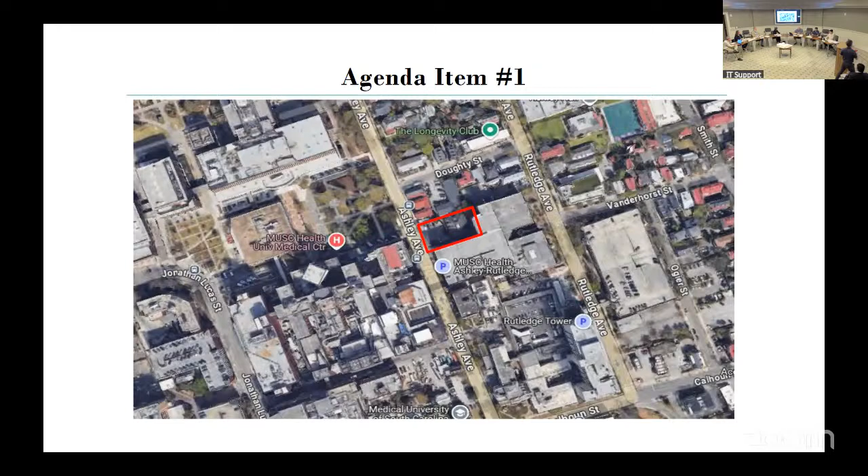Thank you, BD, and good evening. Jeffrey Rendrain, LS3P. I just want to say I echo BD's sentiment, and I appreciate your time here. You just got knocked 5 points. We're going for it, okay.

I think we've heard a lot of great comments the last two times here, and we're going to focus on the last round. The main comments we heard from the board and staff were on the north elevation, and it felt still too monolithic, needing a bit more refinement and breaking down to that scale. In addition, city staff had comments about the use of the green color, so we explored that, as well as the use of wood on the soffit at the porch element. We'll see that today.

So here are the improvements facing Ashley Avenue on the north elevation. What we really tried to do here is start to break down and articulate that secondary mass, the horizontal siding mass facing north. What we ended up using was a kind of hyphen element between the two masses, allowing that to expand up to the top, so we really have an articulated top along that side facing north.

And we continued the vertical rhythms. You'll see, maybe a little bit larger here between the base, marching down on the north side, these widening up to about 2'2", about 26 inches wide, and allows the roof leader still to come down and be exposed there, but gives it a little more breathing space.

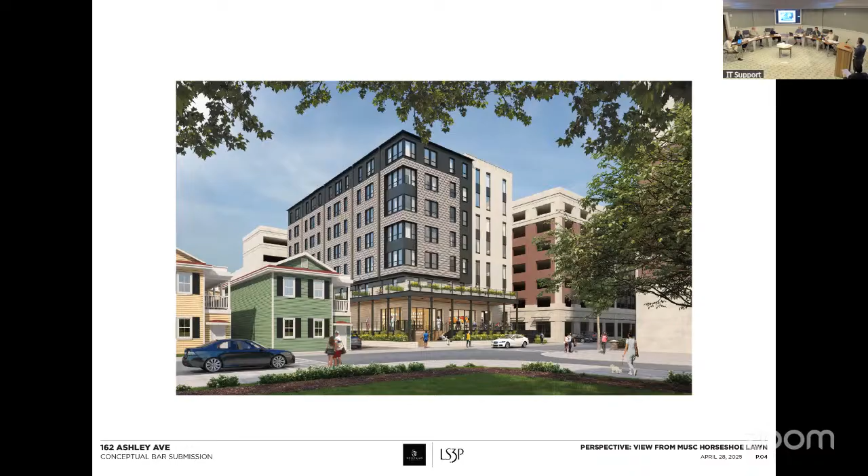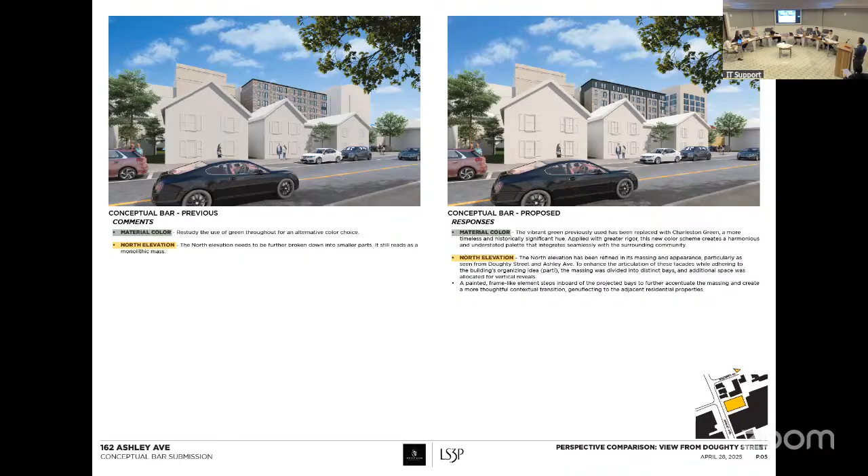So at the north, you start to see again that top expression weaving itself down between the panels and wrapping along the east side, which is facing the garage. Again, those gaps between the panels are 26 inches wide.

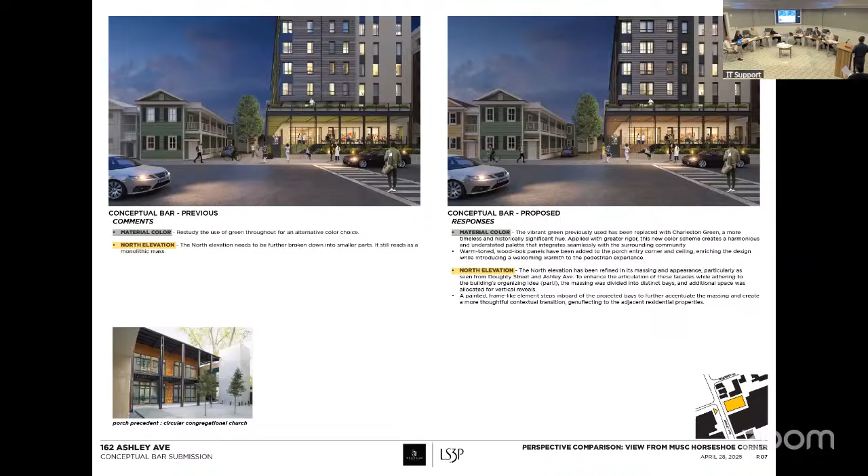And then at the base, really looking again at the porch element, we made some improvements from the original design to this second round. We kept a lot of it the same, but we did bring back that wood soffit element — the color before could feel dated, and we tend to agree with that comment. We wanted to bring that warmth back into the entrance, so you'll see that carved in where the steps reach up and on the soffit. But we still felt like bringing some of that Charleston green color in, so we have a reduced palette of materials — all the metal at the porch element and the base would be that Charleston green color, as well as the siding going up.

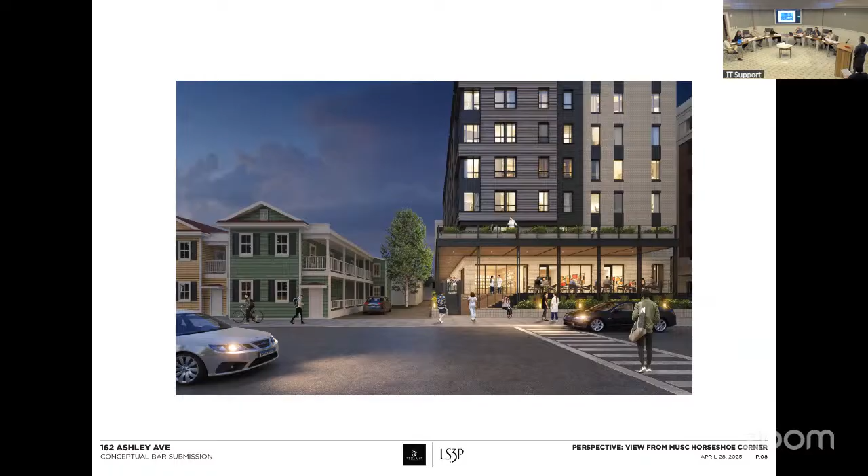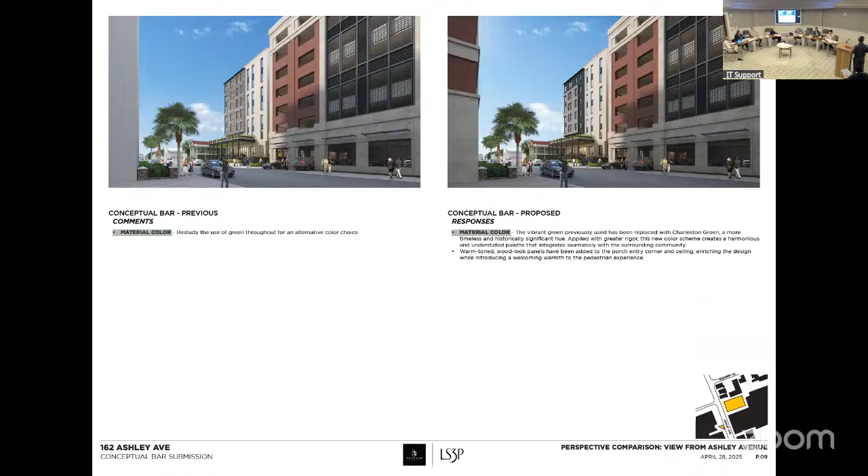This is how it approaches and looks from the south facing, or heading up north on Ashley. Again, you start to really read the three masses stepping down. And here you kind of see the full breadth of all the language of the materials — the brick, the wood, the Charleston green that expresses itself in siding on the vertical side, at the porch, and at these window portals.

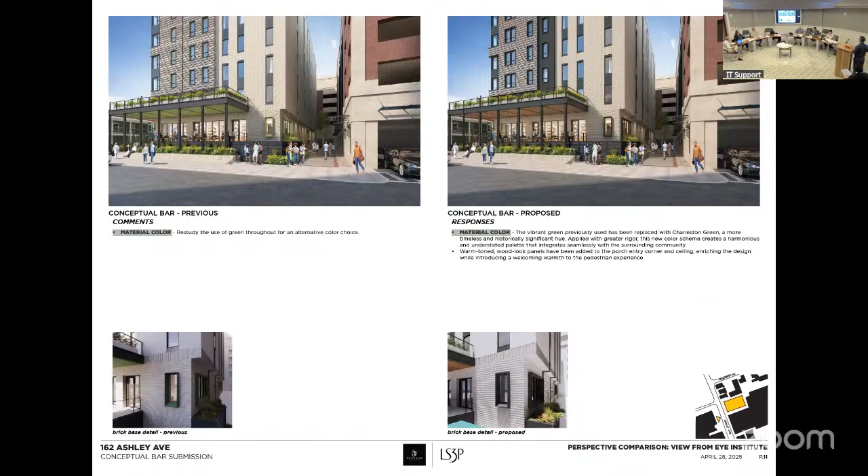Yeah, and that's what we have for you today. We'd love to hear your comments and thoughts here, but we feel like this has really gone well, and we love the dialogue that we've had with y'all. Appreciate it.

Okay, any questions for that? Hearing none, we'll move on to public comments.

Anna Catherine Alexander with the Preservation Society of Charleston. We really appreciate the applicant meeting with us on recent revisions as they have throughout this process. We really do appreciate that there's been effort to visually step down towards the neighborhood with the updates in this design, but in keeping with our previous comments, we do reiterate that...

the actual height of the northern mass should step down further to soften the transition to the 2.5-story single house and the adjacent context. And then lastly, also in keeping with our previous comments, we continue to encourage study of options to work around that transformer location that's on the screen there to create a more open and continuous ground floor treatment, in particular, increasing the opening size and continuing the porch expression to that south corner if possible. Thank you so much.

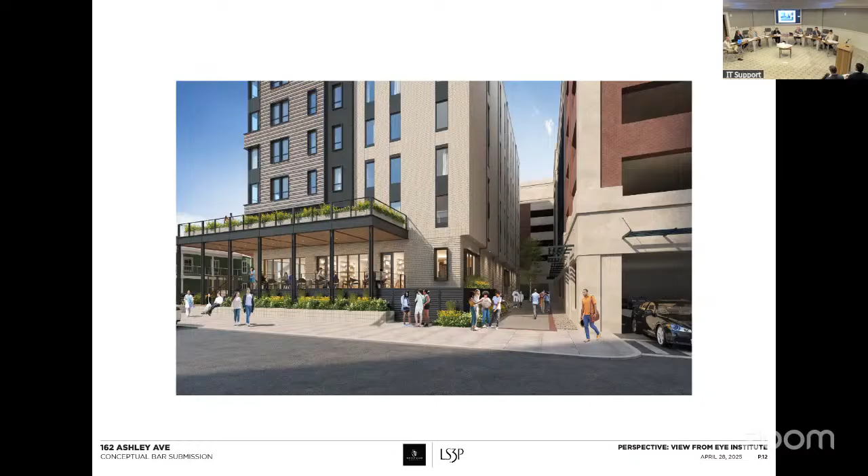Any further public comment? Staff? Sure. At the April 2025 meeting, the board deferred this application for board and staff conditions, which included restudy of the use of green throughout for an alternative color choice and continued study of the north elevation to break down the perception of the mass.

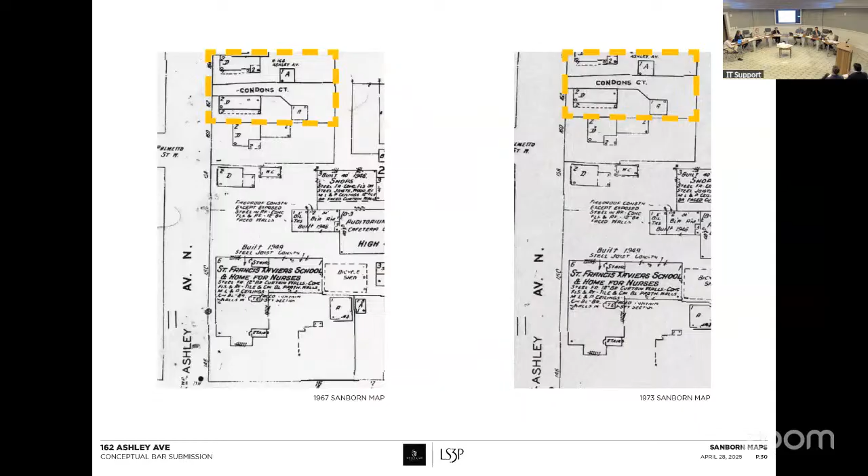The applicant has replaced the use of bright green with Charleston green. Staff approve of this color change.

The applicant has restudied the north elevation to include a material and color change at the top floor and increased width to the channels that provide visual breaks along the facade. Staff support the appearance of the vertical reveals, which create the perception of vertical bays rather than one long mass. Staff also affirm the color change, which provides the illusion of stepping down toward the residential context.

There is a slight depth change on the north elevation between the lighter metal panels and the dark siding. Staff encourage increasing that depth even further during preliminary. Staff also prefer higher end materials other than fiber cement siding for this building.

If siding is to be used, samples need to be presented at preliminary. Staff encourage the study of detailing that does not mimic traditional siding, but rather a detail such as nickel gap, channel gap, be studied to give it a more contemporary look.

Staff conditions at preliminary: bring samples of all proposed materials and provide details of key moments of the elevation in the drawing set. Staff recommendation is for conceptual approval with board and staff conditions. Any applicant response? Okay, board discussion.

Jeffrey, what's the story with the transformer again? So the story of the transformer is, it's their only street facing facade. And so we tried to put it in the back of the building, maybe work out an easement with MUSC. But looking at that, they wouldn't be able to get a truck back there. We need to be able to get a truck back to the building.

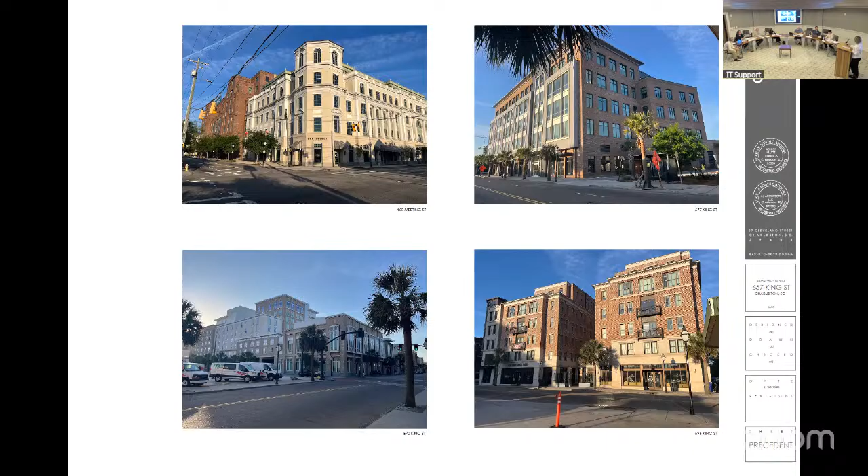We'll look through this pretty quickly since y'all have seen this before. This, of course, to remind you, is the site. These are some precedents of buildings in the neighborhood, just so that we understand the context of the newer structures that are there. Sanborn maps. And this is our site plan.

I'm not sure there's a lot to talk about on the site plan other than the massing of the building has changed slightly as we pushed and pulled those elements. You can see now how it's changed if we go from one to the other, how we've pushed those elements back - the previous submittal on the left and the proposed submittal on the right. We've also changed the color palette to a lighter color brick and a darker color window, and we've added a lot of fenestration to the penthouse elements, which we'll get to in a minute.

This is just an orthographic elevation of the structure so you can understand. We've removed some of the banding on the top floor and stepped it in, and we've maintained the banding at the bottom. And here's a render of that elevation.

This is the King Street elevation. This is another detail of the brick detailing on the building, and you can see the banding. As you move up the building, we're proposing a chevron pattern panel between the windows.

We've actually stepped the brick surround on the buildings to add two steps to it and make them wider. We've added these recess elements that we had on the building that go all the way around, and we've stepped in here. We've added a cast stone cornice here on those tower elements.

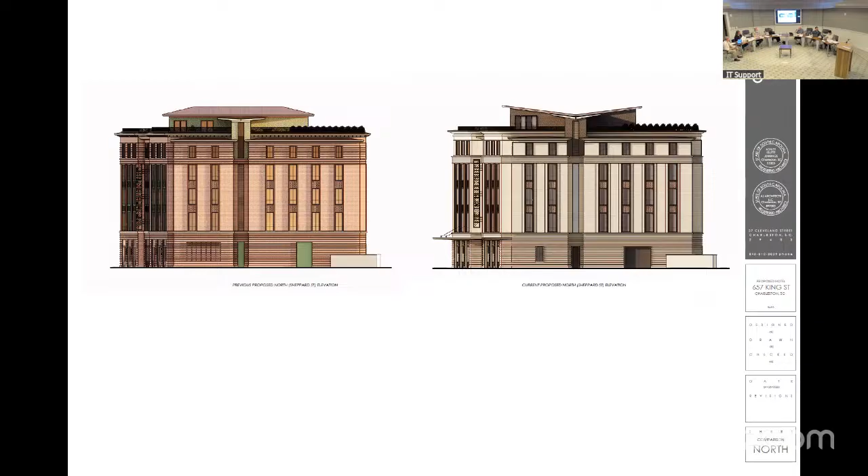Once again, you can see that we've stepped in the top floor and we changed this detail on these tower elements to a cast stone. And this is just that orthographic version of that north elevation, which faces Sheppard Street.

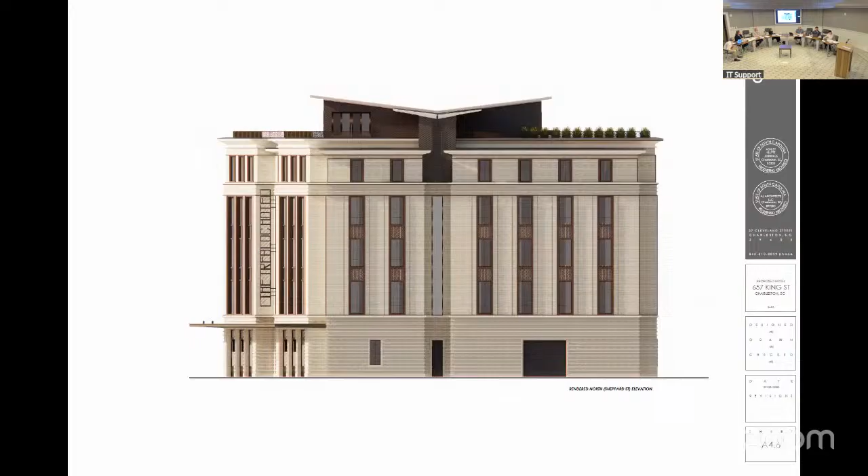There was also a lot of discussion about, we had a brick grid here with some glass block in it. There was a lot of discussion about not liking that, and we've removed it and just put a single window there.

And then this is the west elevation, which faces the overpass. You can see here that there's a little bit of difference in the penthouse element once again. You can also see that we started to add these recesses that give a shadow line here. It's a little fuzzy in these renderings, but the idea is to add a little bit more detailing to all faces of the building.

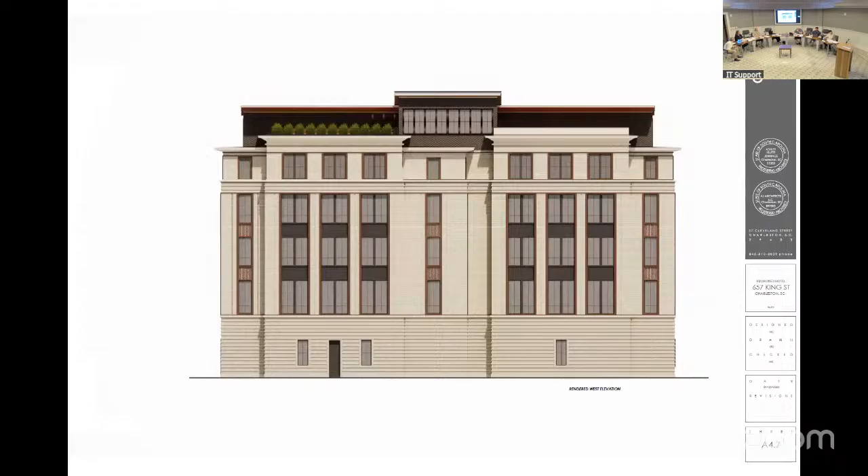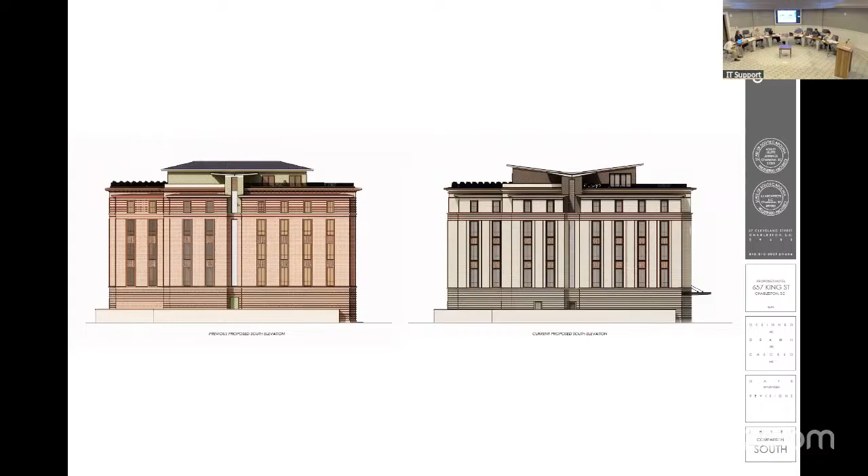And then finally, the previous proposed and current proposed south elevations. Once again, you can see the change in the penthouse roof structure. You see where we've added the cast stones, these elements, the taller elements here, and then you also see that we've added some detail here as well. And that's orthographic of that.

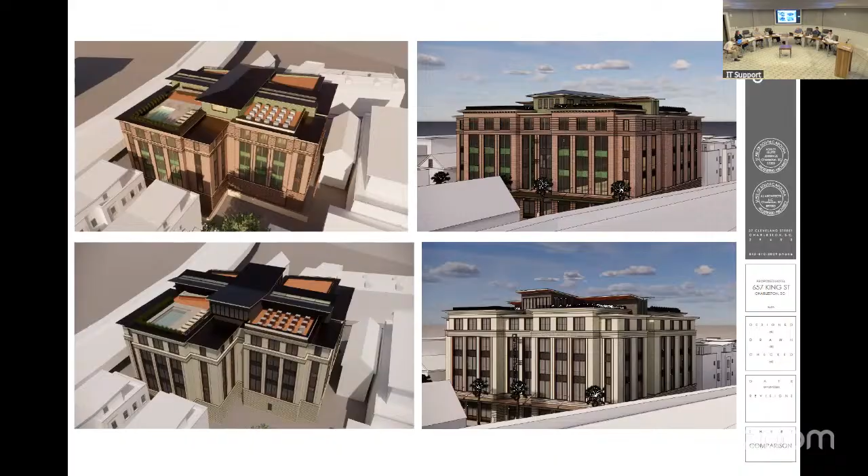And then some previous and current proposed. I think you can see that there was a comment about the building being boxy or flat. I guess that referenced it as being flat. And the intent here was to pull those windows back within the face of the building to give a little bit more of a shadow line, to give a little bit more depth, and to push and pull those elements so that there was some more articulation in the building.

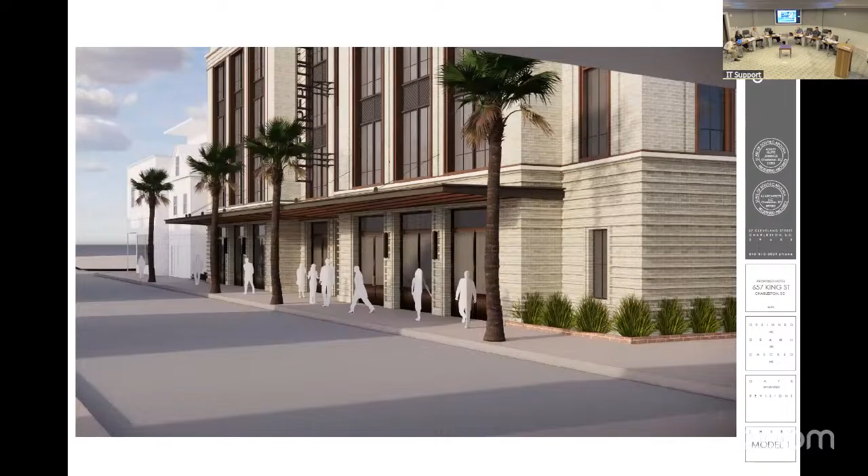And you can see here that we've started to introduce some more detailing on the canopy. This is a kind of a representation of a sunburst pattern that you would see in Art Deco style motifs.

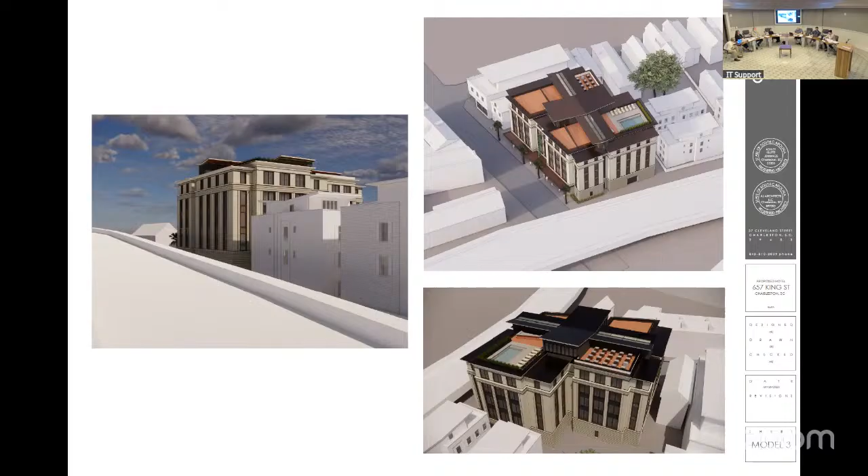I'm looking at it as you look up King Street. This is the view from the overpass here. Just an aerial so that you can see how those penthouse elements work. And this is looking at it from the back side, if you were a bird in the air looking down on it.

And then the rest of the presentation is just the variations between the plans if you need to go through them. And I'll be happy to answer any questions.

Okay, any questions for the applicant?

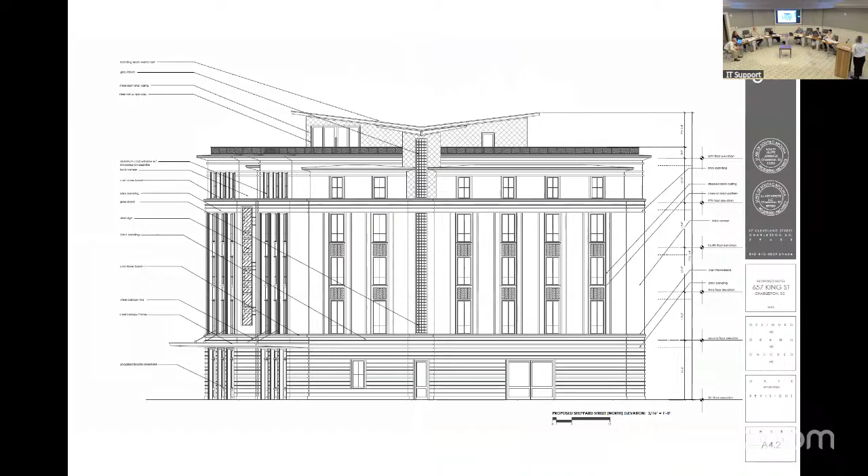I have one for you. I'm trying to find the best elevation to. Let's see. Might be elevation. Sorry, I got confused in the drawings here. 4.1 King Street elevation, I'm sorry. I'm trying to find what page that's on. At 4.5, I wrote down 8.5. I'm sorry about that. I think it might just be a rendering question, but I was just curious. I know that elevation's on an angle. Is that elevation taken square to the building or is it square to the front elevation?

It's, because we set it up so that it was orthographic, so it eliminated that in the rendering program that we did, so you would see this piece a little bit. And what I was curious about is the windows at the upper story, the kind of fifth floor windows.

The mullion bars at that level are shifted from the other mullion bars at the 2nd to the 4th. Is that intentional? It looks like the windows are also off from where those are. It's a rendering, but that story steps in - it's that angle change as you're looking at it, just the rendering program.

So if you look at it in the orthographic, the intent is that they align. Does that make sense? Yes, okay, I just wanted to make sure.

And then one other simple question too. At the ground level, above the doors, are those supposed to be kind of translucent spandrel panels, or are those gonna be kind of visible glass above those? Are you talking about this area right here? Yes, that's a transom. But is it visible or is it translucent - can you see through it? You'll be able to see through it. Okay, yeah.

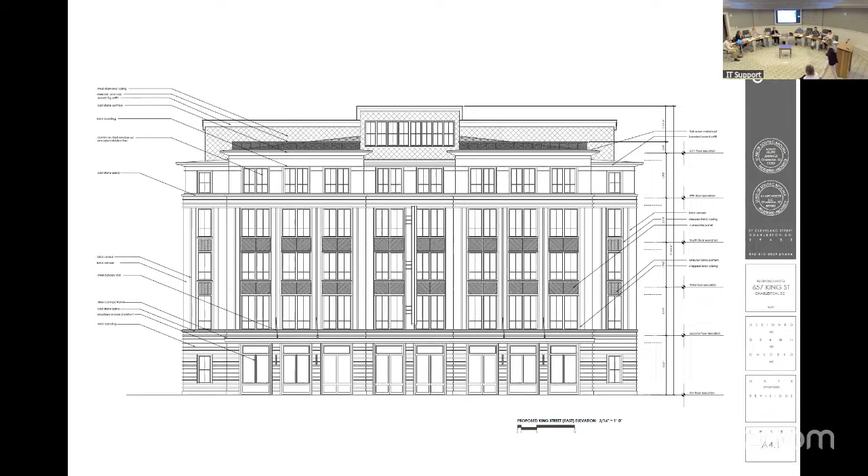At that March meeting, legal was consulted and made a determination outlining that when 2 height districts affect 1 parcel, the code provides that the least restrictive district will apply, but only for 50 feet from the boundary. The applicant's proposal is 45 feet from the boundary, and District 6 is the least restrictive for this particular submittal. Hence, per ordinance...

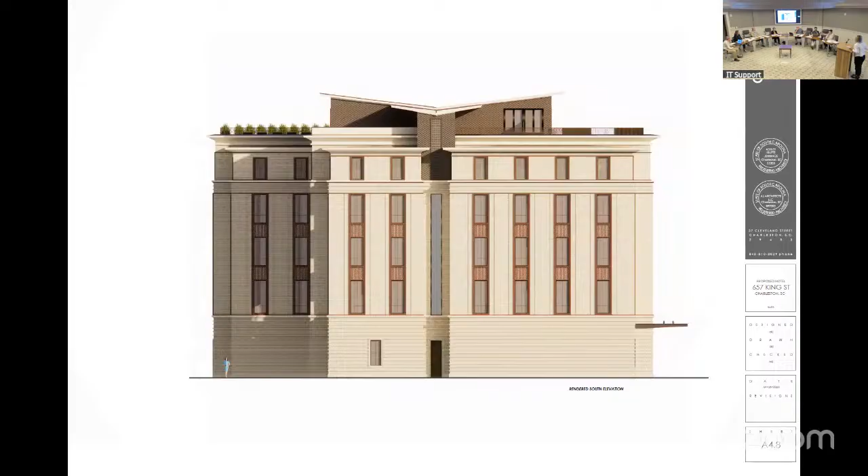The other comment I wanted to briefly speak to was the idea that the structure completely fills up the site. And it doesn't.

We do see really good examples of structures in the city that build to the 0 lot line. This is definitely not one of them. As you can see, we've got space all the way around the structure, and we're stepping it back in the front to create a little bit of green space. So the building does not 100% occupy the site. It doesn't even go all the way out to the sidewalk at the front, to give a little more width of sidewalk there. Those are the only comments I was going to make.

Thank you. Okay, all right, on to board discussion.

Well, usually very talkative, don't have anything. Well, you like it?

You want to go with your quote from the previous project? Yeah, I think it's a substantial improvement. I appreciate you working on it.

I appreciate you being here today. I had noticed the same thing about the height when this first came before the board, and we talked about it with legal. I think this is one of the crummiest little ordinances we got, saved by 5 feet. But it's apparently the way the city is interpreting it, so we're taking that at face value, as we must.

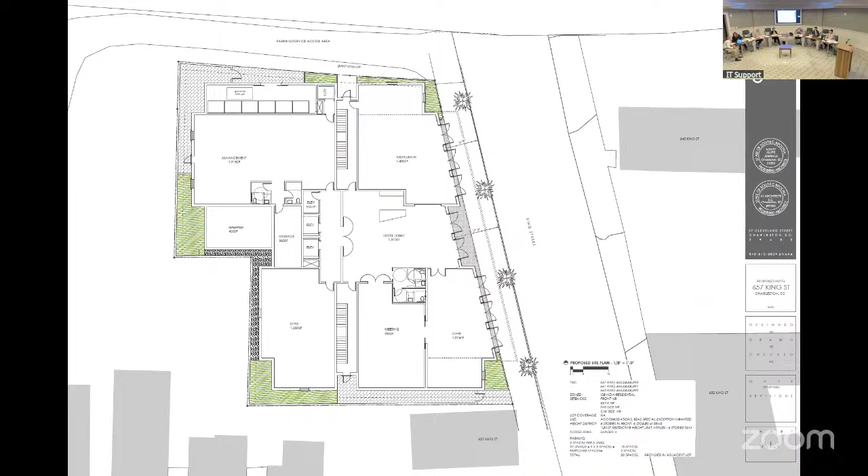One part of this project that also caught me, and that we talked about in the last meeting, is viewing the structure from the street and then also from the overpass. I'm glad you included additional renderings from here, because I think this building has two experiences, one at high speed and one at pedestrian scale. I went back to December to look at the 2, the 4, and the 6 to see what that massing led to, and looked at this structure too.

It seems to try to balance a lot of the experiences around this. A lower structure, while more deferential to what might be going on directly adjacent to it, would also lead to seeing a bunch of mechanical units, which is what you experience as you drive further up that street. It's a tough thing to balance.

I do think we're trying to engage the pedestrian walkway in an engaging way. And I do think the materials as rendered, especially the articulation around the windows and the cornices detailed by staff, is a significant improvement versus before.

Okay, any further board comments or motion? The comment's been made by the public that the structure and its massing doesn't fit in this block, right? And I would agree with that. It's 2 and 3 story structures all the way around it, all of which are historic.

When you look at the comparison models, the 2.5 story structure right next door to the proposed project is just snuck in there. It's overcrowding, regardless of as much space as you say is going to be there.

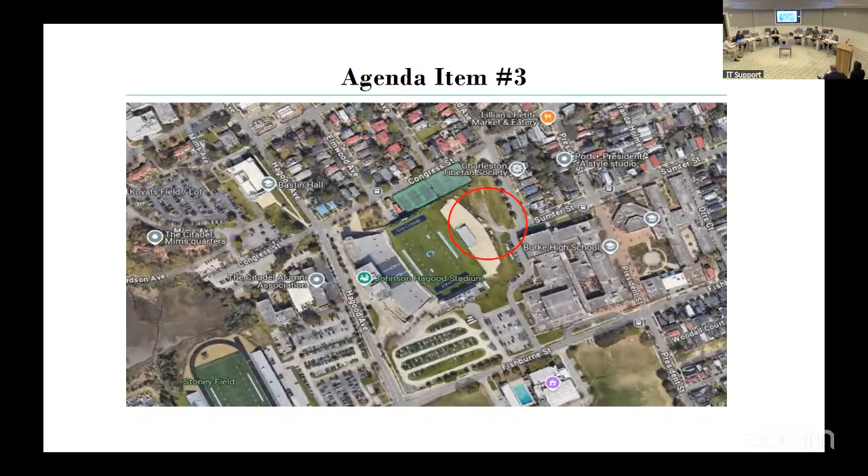Good evening, my name is Laura Slagle. I'm with McMillan Pazdan Smith Architecture, and I'm representing the Citadel tonight for the Johnson Hagood Stadium East Stands replacement.

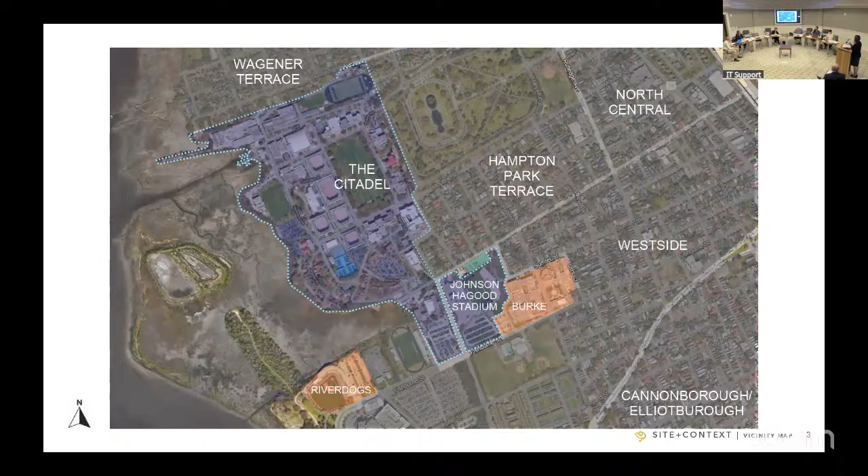Just to get you oriented, I'm sure most of you are familiar with the Citadel campus and the west side of the peninsula. The stadium is just south of the formal campus, between Fishburne, Hagood, Congress, and Parkwood. Several of y'all have driven past this many times. Here's an aerial of the building, and let's zoom in a little bit.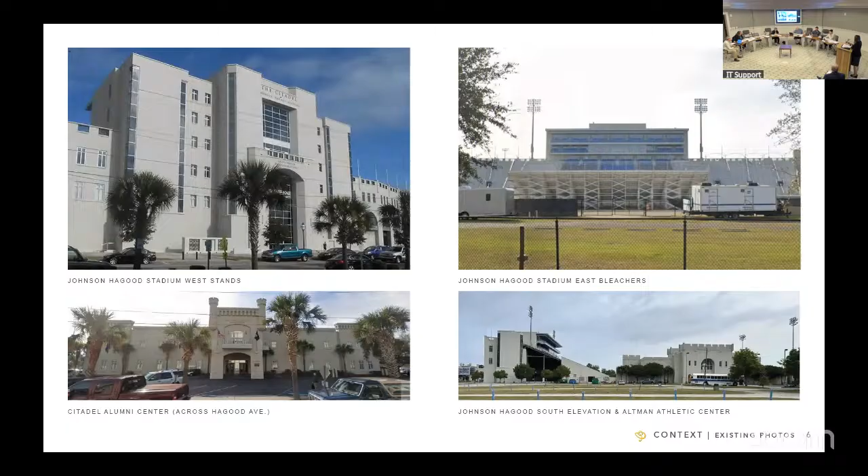Here are some of the adjacent buildings and across the street. There's Burke High School, and also some smaller residences on Sumter and Parkwood.

In terms of contextual inspiration, we really wanted to draw details from the Spanish Moorish style around the stadium. We wanted to take cues from the materials that are out there, and also that sense of place and permanence that the Citadel instills in all of their buildings.

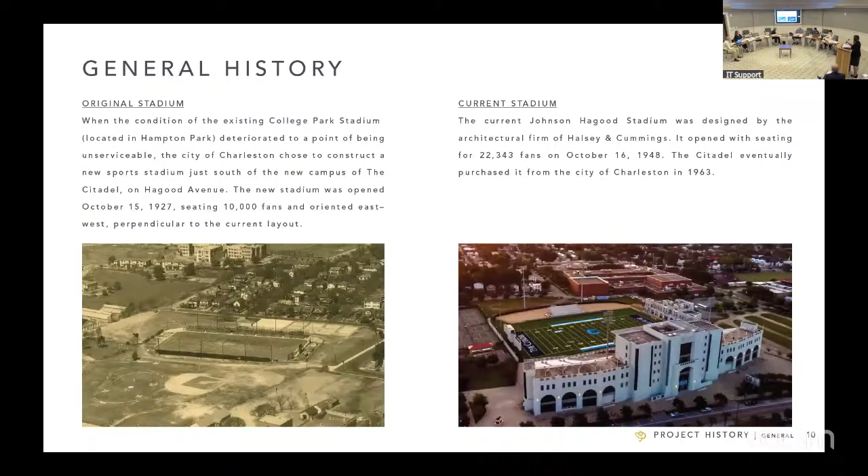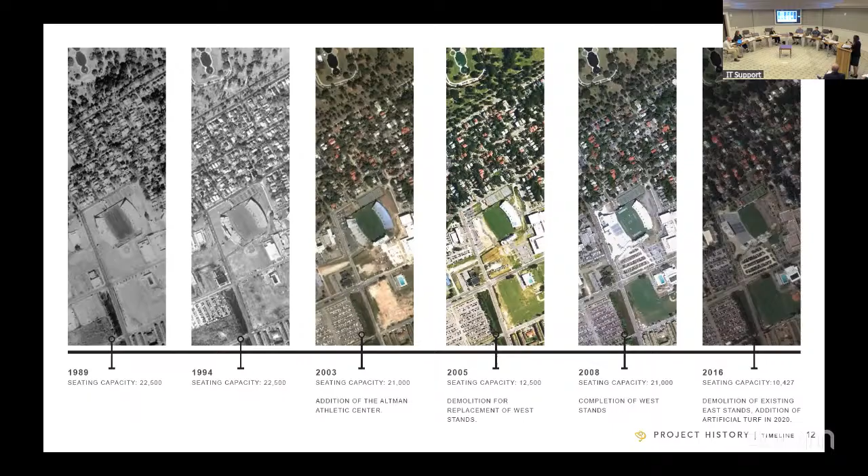Just a quick look at the history. The image on the bottom right is how we know the stadium today. It was built in the 1940s with about 22,000 seats. We've compiled some maps and aerial images through time showing it changing. There have been significant changes over time: they built the Altman Athletic Center on one end, rebuilt the home side seating, and most significantly, in 2016 they tore down the pretty significant east side permanent stands and replaced them with the temporary ones that stand today.

Right now there are 1,000 temporary seats out there, and the reason we're here today is that we are going to replace those temporary stands with permanent ones, moving from 1,000 temporary seats to 2,000 permanent. The other big part of the project is to provide permanent toilets for visitors. Currently, they are wheeling in portable toilets for home games, so this project will provide permanent toilets, along with some accessibility and infrastructure upgrades.

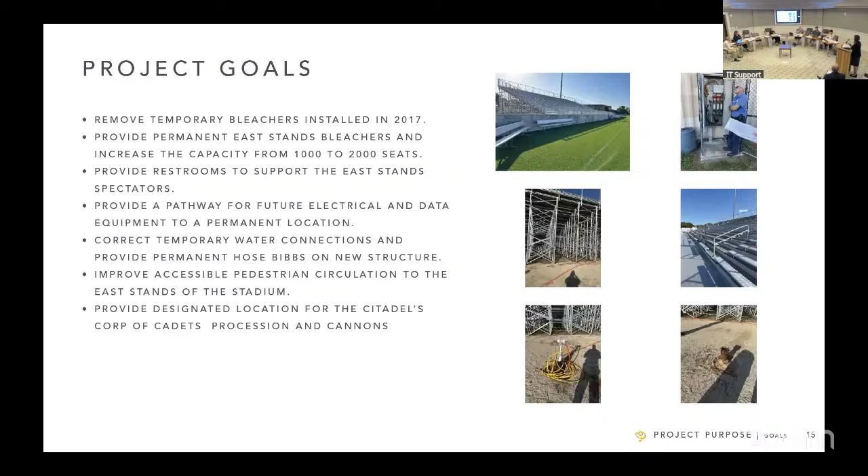The east side, with the existing fence and gate, is really more of a service entrance. This is where the Citadel facilities and maintenance come in, where the visiting buses park, and where the food truck enters and the cannons are rolled in. So it's important to note that while we're putting new bleachers there along with a new toilet building, it's not going to become an entrance off of Parkwood.

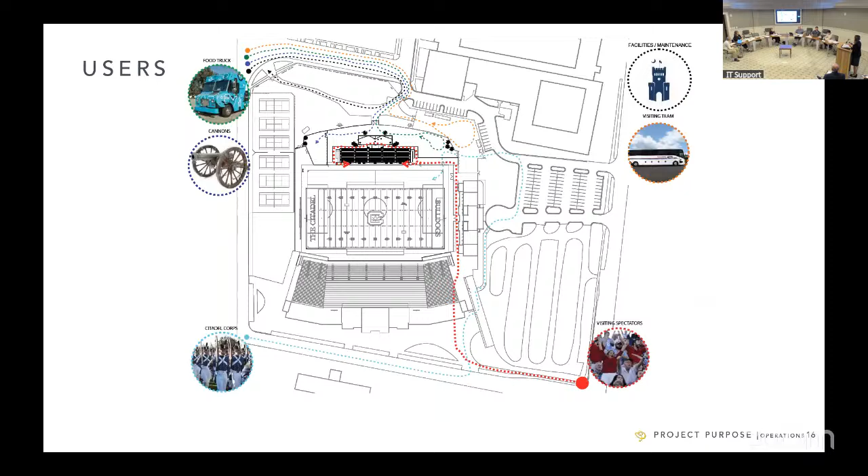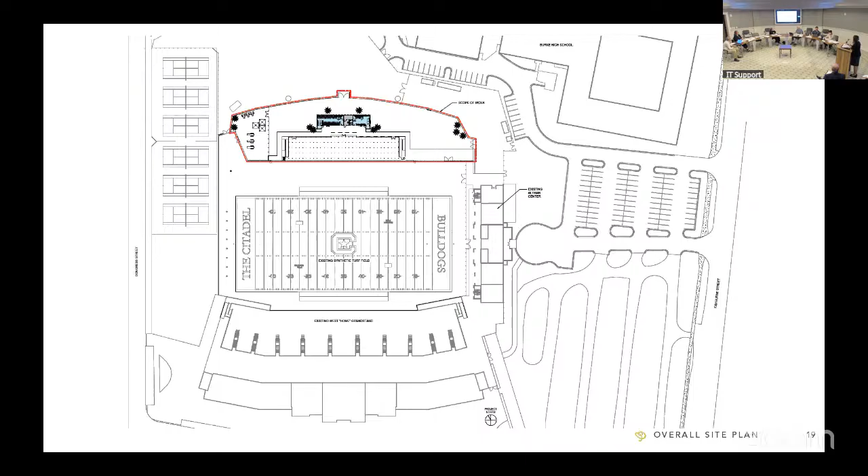This is the ground level, so you're seeing the underside of the aluminum bleachers, the leg truss structural system that holds it up, and the toilet building. What you'll see here is that it's a very utilitarian building: men's and women's toilets, a family toilet, a janitor's closet, and storage — that's really all the building encompasses. We put all of the doors to these rooms on the stadium side facing the bleachers, so we could have a nice, clear, clean wall facing the street behind it.

But pretty simple — the scope also includes a small fenced area on the left of the plan where the cannons will be rolled in, and most importantly, an accessible path from the other side of the stadium where the visitors will enter.

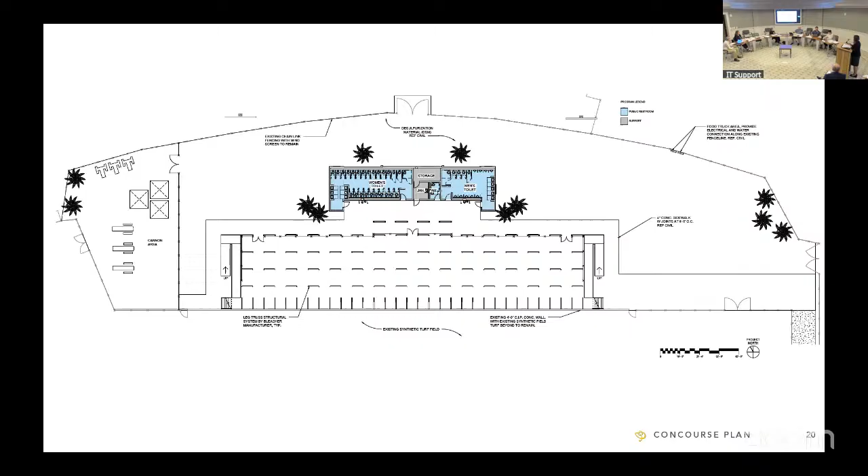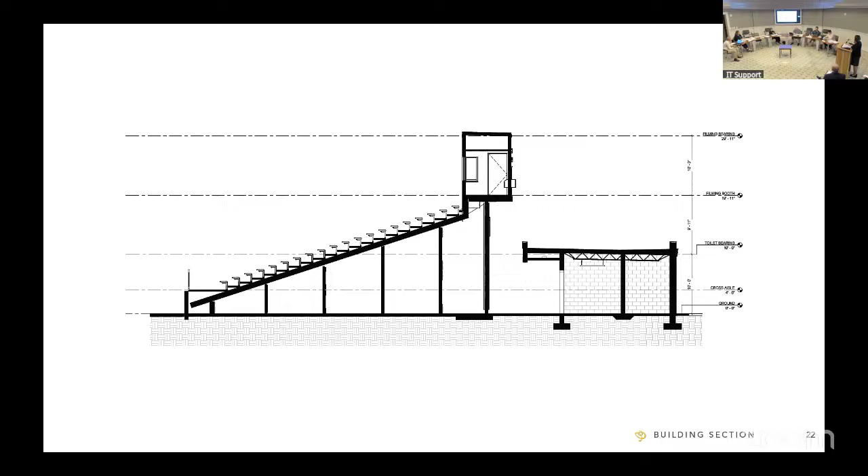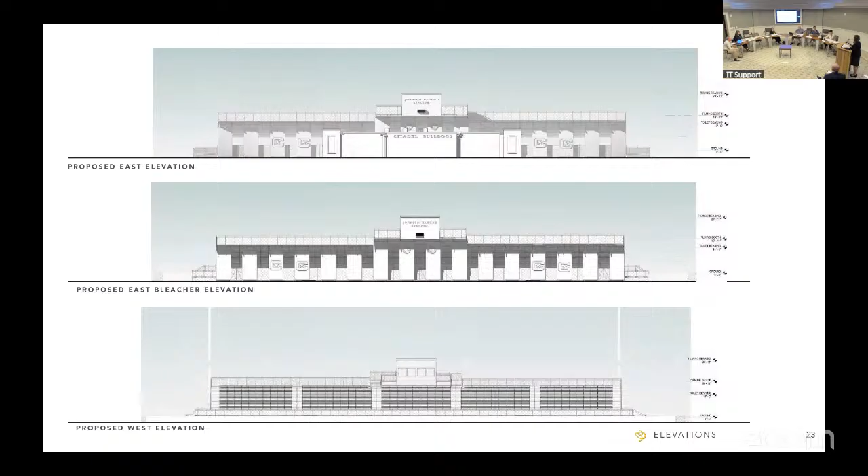There's a fence to protect it, but we also wanted to provide a moment for some signage and branding for the Citadel. This is a football stadium, so we're looking at the fan experience and using that to our advantage instead of just having some bleachers behind it.

Here are some side elevations. You can see we're using that branding again. And this might be the most helpful view here - we recognize that this facility is kind of a background building in the stadium. It's not the most important building there, but it is important to the Citadel for its function.

So we want to be sensitive to the context and help it blend in, with some subtle nods to the stadium, but we also don't want to overdo it. We think it would be inappropriate to do too much decoration or ornamentation on a toilet building. So we're really looking for that balance.

You can see here that we did step the facade in and out, and a little higher and a little lower as you go across that long linear building to break it up. We're using some expressed frames - that's a detail pulled directly from the Altman Athletic Center and around the whole stadium.

We did not want to put crenellations across the entire building, but we did find it to be a useful tool to help us as we step that parapet up and down and make that relief. Most importantly, we're using the Citadel gray color for the stucco so it'll blend into its context, and then we're introducing some of that branding I mentioned before.

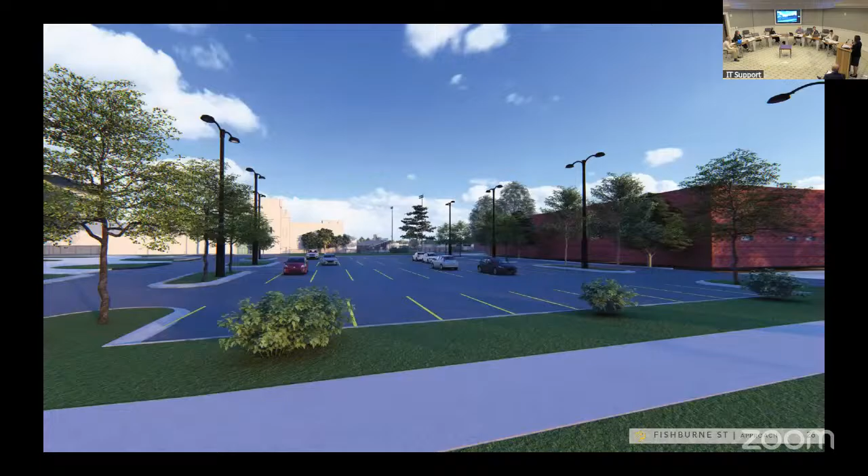And now I'm just going to walk you around and show you some of the views we prepared. This is from Fishburne Street, and you can see Burke High School to the right, the Altman Athletic Center behind the trees, and our little bleachers right in the middle of the back. So you can see that the scale is fairly small.

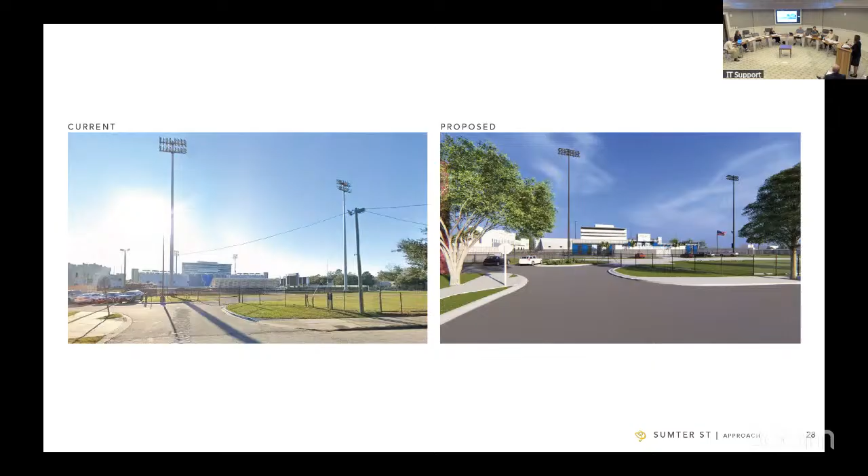I'll flip through these quickly. This is from Parkwood, so you just drive down that road a little bit farther. There's a couple breaks in the trees that we wanted to study to see what that long view would look like. As I flip through, what you'll see is that it's really just a cleaner look than what was there before - we're really replacing those temporary bleachers with something that's a little more aesthetically pleasing.

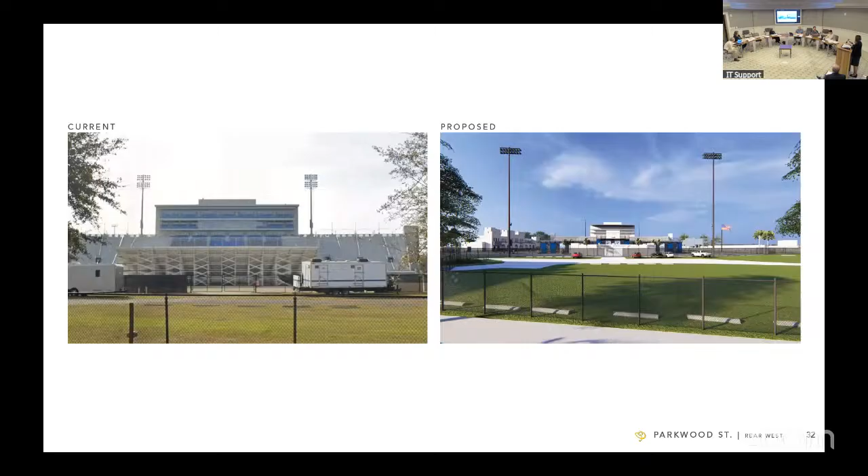We tried to clean it up, and yeah, I think this is a good example - instead of seeing the structure, you're seeing just a little bit of a nicer look.

This is from Hagood Avenue, and again, this is probably the best way to see the new building. I think you just recognize it.

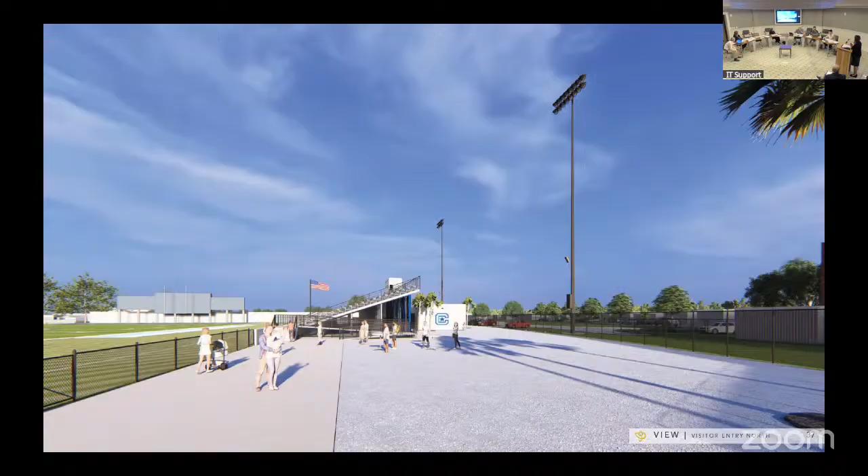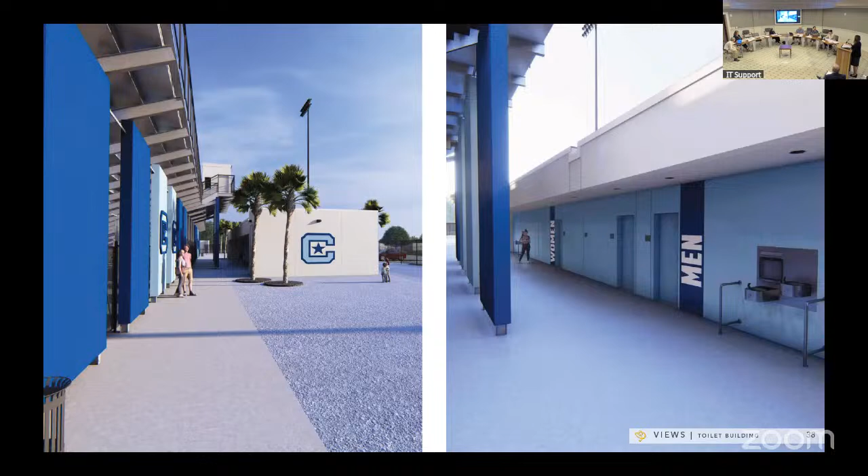This is what the visitor would see as they are walking around from that home side and approaching the bleachers. And then as they're actually coming down from the bleachers to go use the bathrooms, this is that area where they're approaching the bathroom doors. And this is just an aerial to give you that final orientation.

In summary, this is a small insertion for the Citadel, but a very important function to replace those temporary bleachers and finally put something permanent there. Aesthetically, we tried to really balance that kind of utilitarian building with blending into its context and being part of the Citadel campus and stadium.

This time, I'd welcome any comments or questions. Anybody have any questions for Laura?

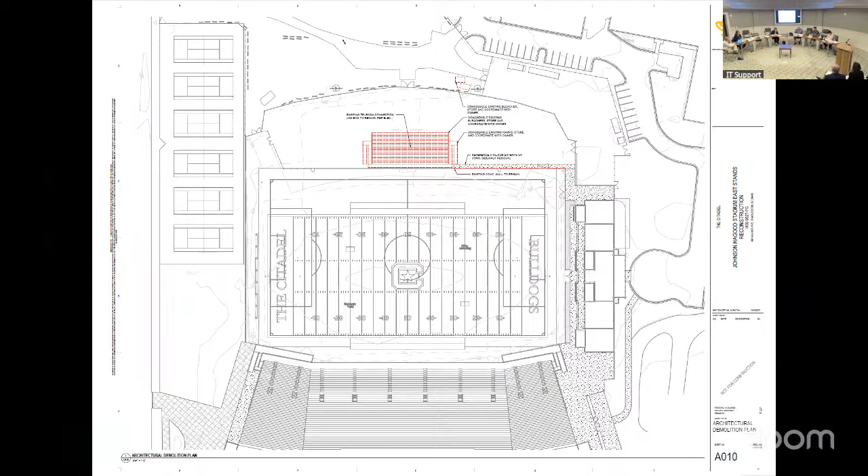Staff commend the thorough presentation of the context and project history of the stadium's various demolition and build campaigns to clarify the current request. A separate signage package will need to be submitted for all words and graphics on the bleachers and support building, as these are not part of any approvals or motions for this board discussion. Staff appreciate the attempt to visually cover the exposed bleacher structure with large-scale wind screening panels; a more permanent architectural solution is encouraged, such as perforated metal screening. The restroom building is modest but includes some references to the college building context; staff encourage additional subtle architectural elements as details are studied. The galvanized steel bleacher structure is a challenging choice for this climate, so staff encourage high-performance coatings in the specifications as the project moves into details. Staff has no conditions and recommends conceptual approval with board and staff comments and final review by staff.

Thank you. Laura, do you have a response?

Thank you. We appreciate the comments from both staff and the public. This has been a process to try to find a balance for a toilet building - we recognize it's a utilitarian structure, and we're trying to balance how much ornamentation or decoration versus how plain to make it. We'll take those comments into consideration and continue to study the facade. I also wanted to mention the comment about trees and landscaping - that's outside the project scope and boundary, but the owner does plan to address landscaping along Parkwood as a separate effort, part of their normal campus maintenance. So that might not be part of this scope, but it's understood by the owner. Thank you, we'll take all of these comments into consideration.

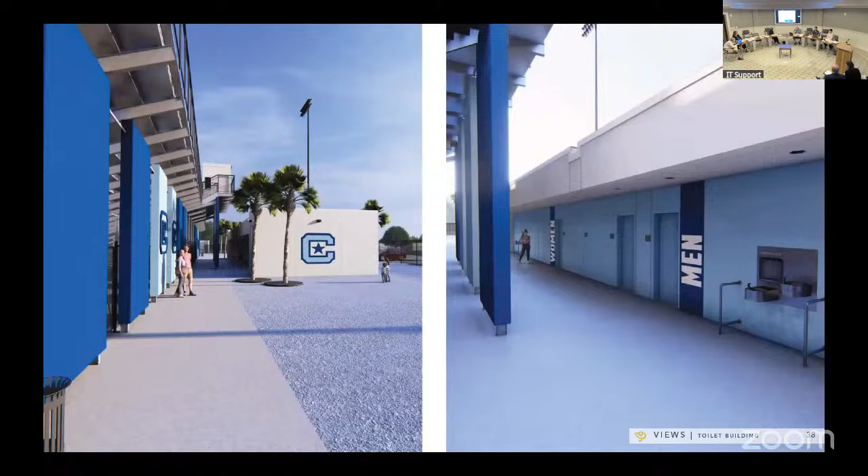As we're getting there, I'm thinking about Huger Street, Hagood, Fishburne, and Parkwood—you ride around and what you see is done well, like this.

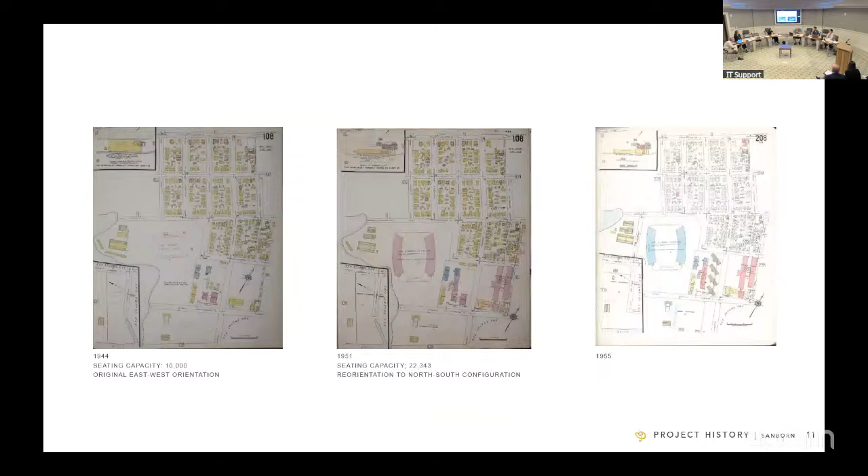And then if you go to page 25—as you're going through it, I use your historical photographs, which show the evolution of changes and detailing made to buildings. It's exceptional work and design.

And we get to this, and the existing visitors' bleachers look like the back—unfinished, if not a temporary system, which it was, as I understand. Those stands were built as temporary, and the addition, as it continues, looks to me like an extension of that temporary use.

I also found it amusing, Lauren—I'm not suggesting it was planful—but the use of the term toilet building and service building. I'm not surprised Kevin shows up with something like this. This is a guard tower, I guess, or something like that. But everything has a label.

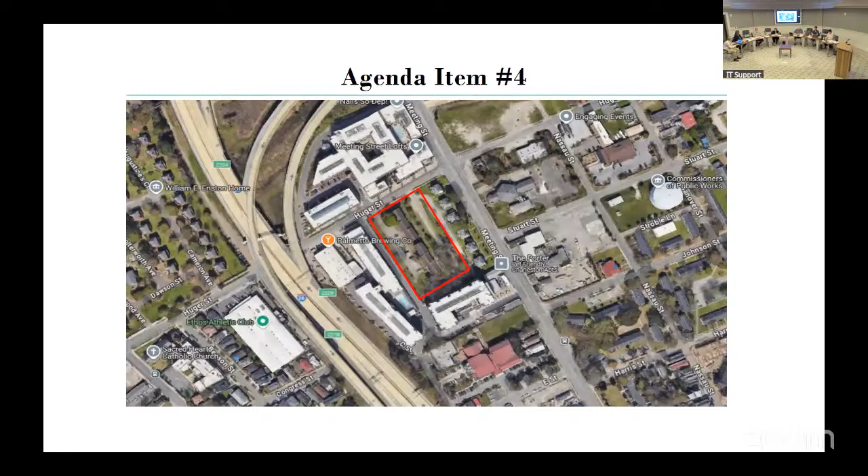Should have been in there. Oh, no. All right, well, I will verbally say, just a second, Matt, we're almost.

So here's my clarification. A different design for this site received preliminary approval with final review by staff on July 24, 2024, and permit approval by staff on October 8th, 2024. Per legal, when this submittal, the one we have before us today, receives conceptual approval by the board, any previous approvals will no longer be valid. This would be the sole application for the site going forward. This submittal should be reviewed as a new application for conceptual review.

Yeah, I just want to make sure I understand. Sure, absolutely. So the previous application was brought in by Eddie Bello, and somebody else maybe, but that was who was responsible for the design that got ultimately approved, all the way through the permit. And so now this is a new application, new architect, new design, so we should treat it as completely new at the conceptual level. Thank you. Sure. Okay, now we're ready for applicant presentation.

Thank you, BD. Appreciate that. I appreciate y'all letting me be here this evening. My name is Matt Davis. I'm the principal of Davis Architecture. And I'm grateful to be able to present this project to you this evening for a review and comment for conceptual approval.

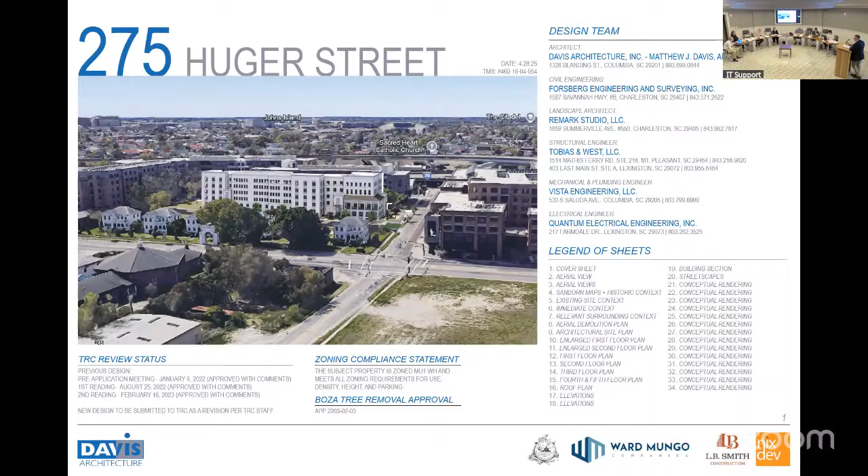And they served the community that was in need of housing. So I'll walk you through the images here, look at the 3D renderings to discuss the architectural details, and then open it up for questions.

So this aerial view identifies the location of the site. It also highlights proximity of this project and the 6 Grant homes that front Meeting Street to the Enston neighborhood, which is across the highway there, that was constructed starting in 1887. I reference this, it's located west of our site.

It features a monumental arch similar to the Grant homes. It serves as an organizing part of the campus. It also served, the Enston homes also served as an inspiration for the layout of the Grant homes and their location.

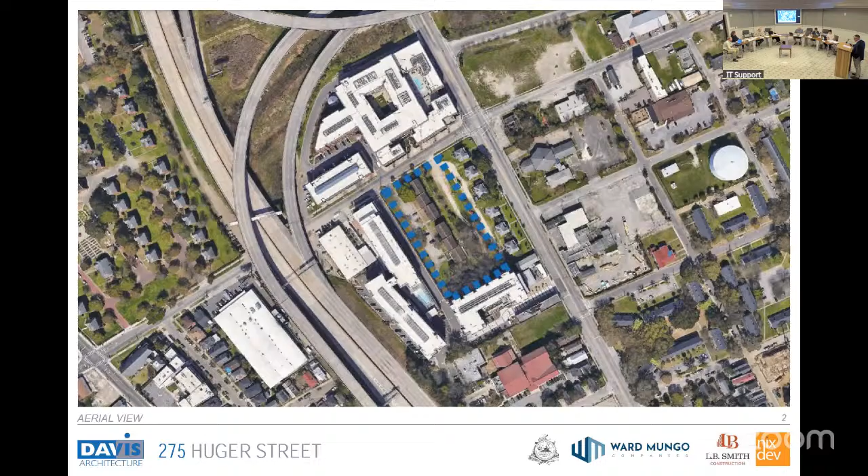These are just some various aerial views of the site.

This page highlights some of the familiar architectural language that we employed in the design of the new building. The photos in the upper right and the lower left show a common Charleston street facade where the adjacent structures are connected by a single entrance, or where larger facades are divided into two halves with a single door between both halves. The photos on the lower right highlight the piazza design, typically an outdoor living space, a lot of times located on the second floor of many residences in the city, particularly in single house design.

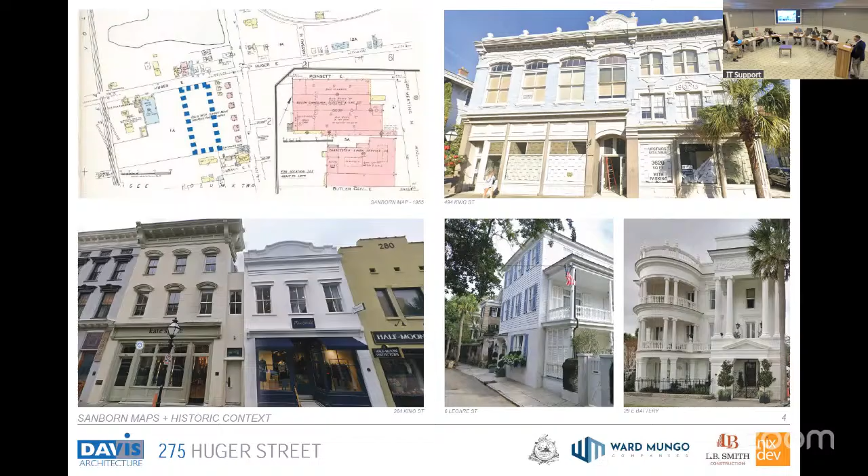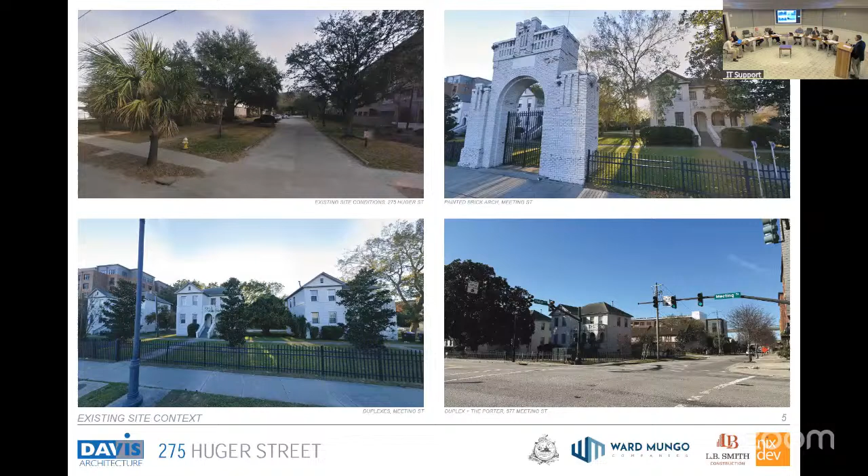This is a view of the Grant homes from the street level. You can see the white L-shaped brick structures set apart from each other, and then you see that monumental arch that also faces Meeting Street.

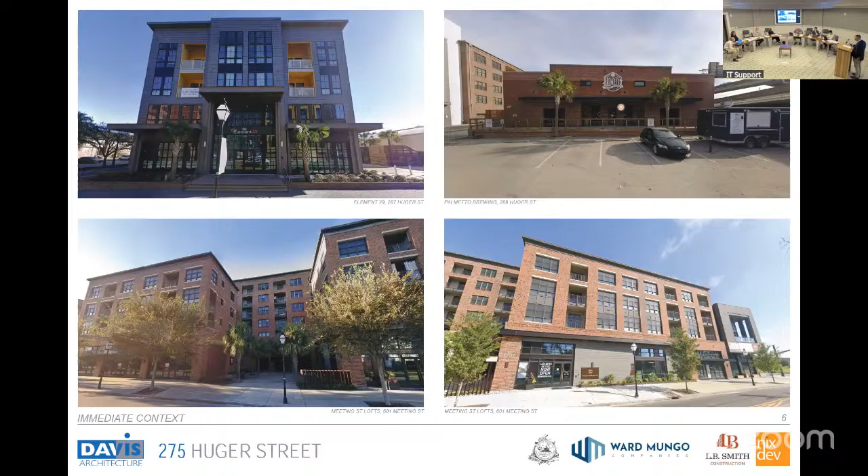These are the buildings that are immediately adjacent to our site. These will be next door and across the street from the project that we're presenting. These buildings are located in the surrounding area. I think they serve as more relevant examples of the contemporary context on which we leaned for the inspiration for our design.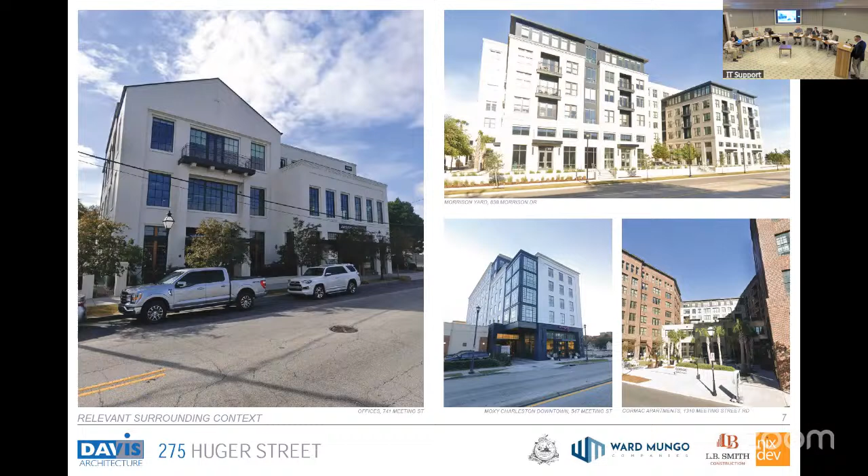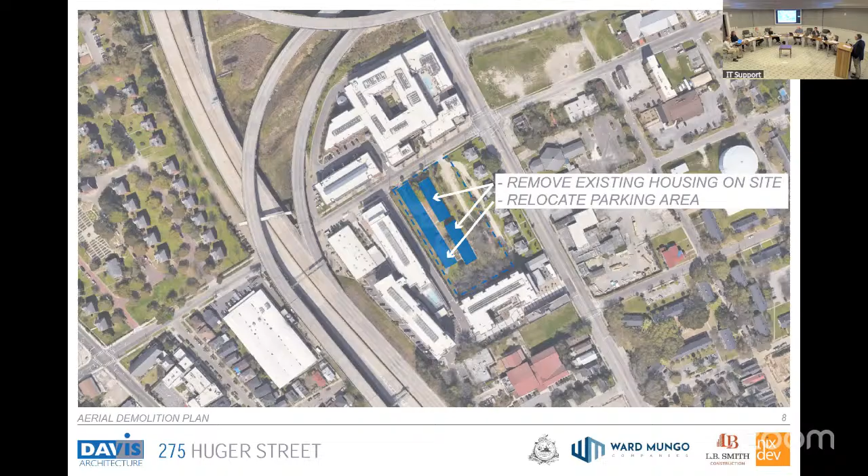This is just a shot of the aerial demolition. There are currently some two-story townhome units located in the blue rectangles. Those will be demolished before this new structure gets built.

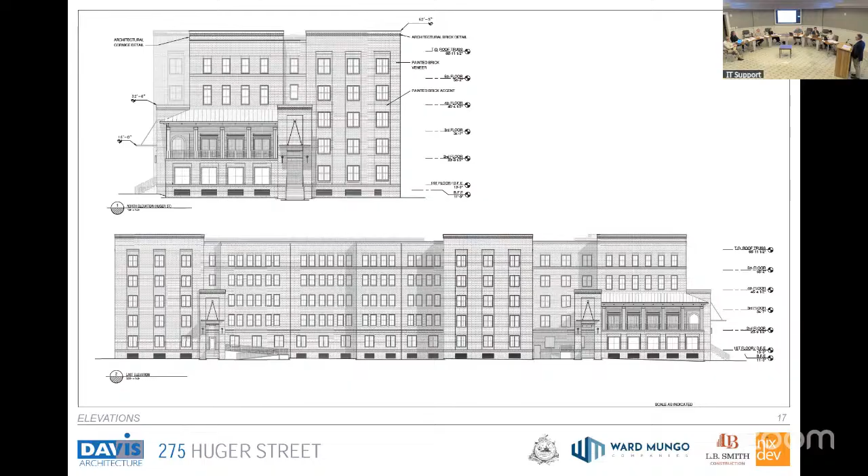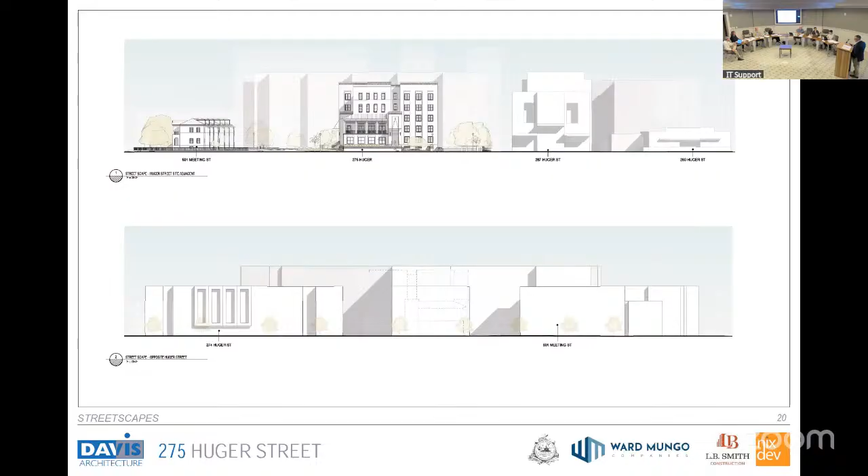The entire facade will be painted brick. In this proposal, we're proposing a 2-tone palette in subtle shades of white. On the right half of the facade, there are 3 recessed brick panels that rise from the brick soldier course at the first floor to the ceiling height of the 5th floor apartments. At the top, the cornice is defined by a composition of a brick soldier course, rowlocks, and a dog tooth detail, which you can find as brick detailing in the Grant homes.

That detail is found elsewhere on the structure, also in some of the hardscape elements. On the left side of this Huger Street facade, the ground floor is defined by large openings of clear glass, which are in front of administrative and public spaces of the building.

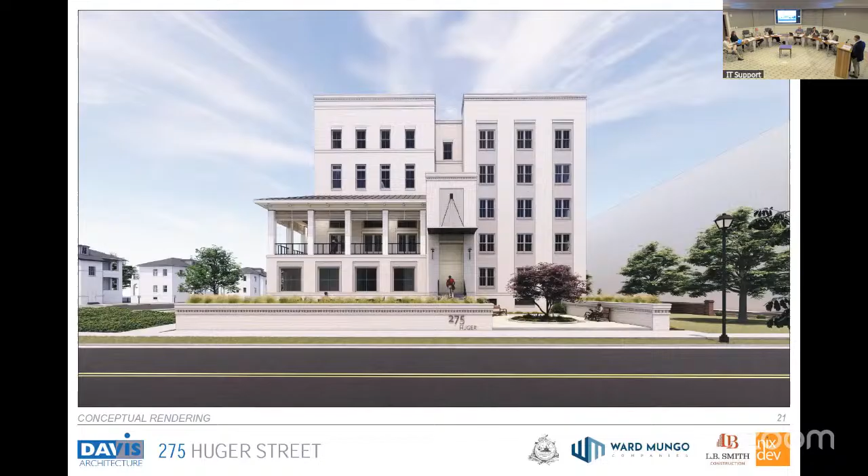The defining feature of this facade is the piazza on the second level. It's got a 14-foot ceiling height set at the second floor of the building. The porch wraps the northeast corner of the building. We thought that would be an ideal way to take advantage of the indirect light for the community room.

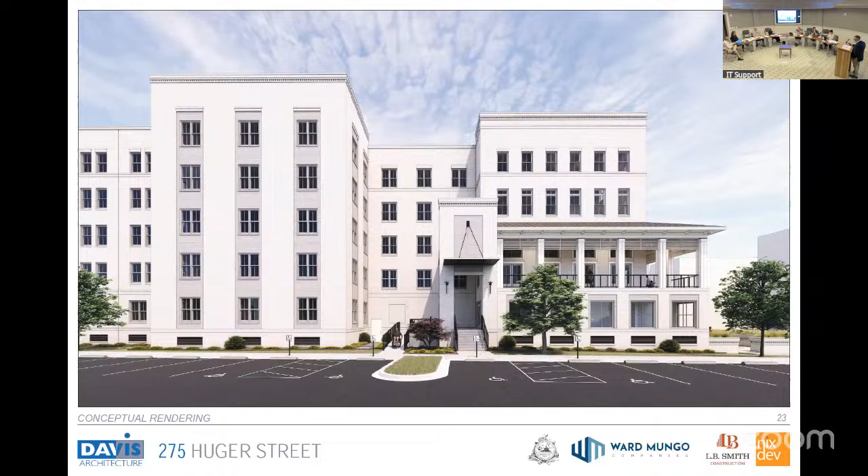This is the second of the three entries on the building. It also shows, to the left of that arch entry, the second time we've used a block with the vertical recess panels.

This view of the east facade is between two of the Grant homes. To the left of the block with the vertical recess panels, we've introduced a new pattern of windows - twin window units that run along the first floor. On top of this line of windows at the second floor level is a new brick soldier course and a rowlock. There's a brick detail that carries along the sill height at the fifth floor of those windows, also present on the left-hand side of the Huger Street facade.

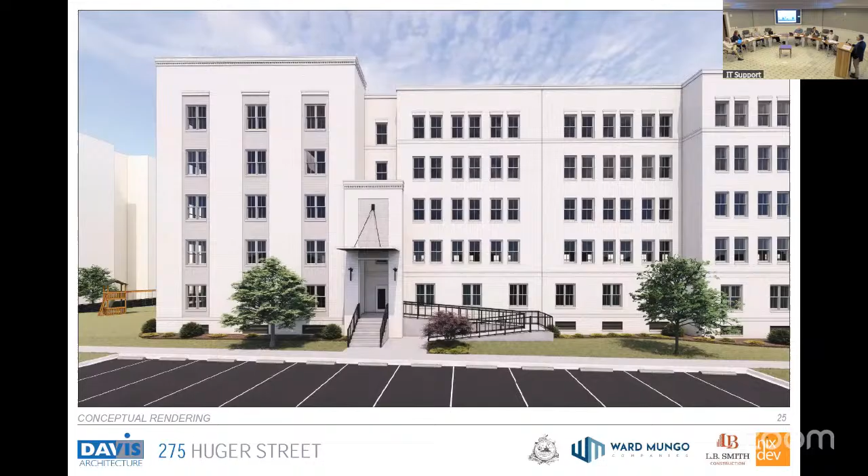At the far end of the parking lot elevation of the building is the third time we're using these recessed brick arches, recessed brick panels as an organizing element. This is a long view of the parking lot side from the other end of the building.

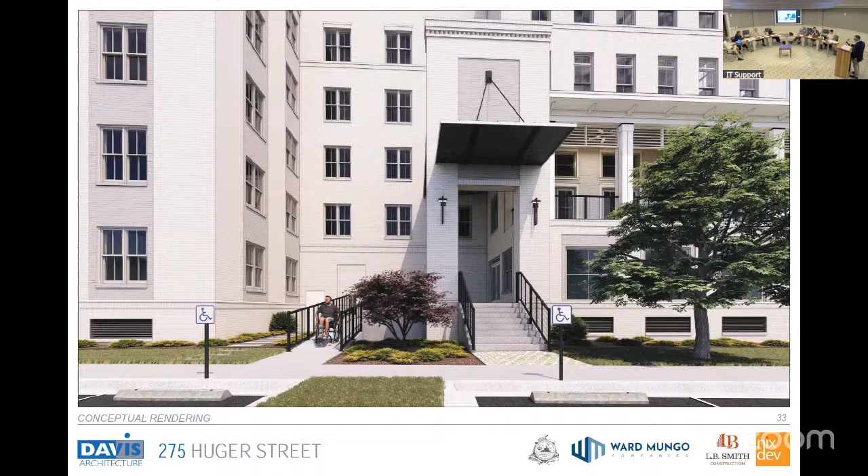This is an enlarged view of the middle entry to the building. Probably will be the primary entrance for the residents, because when you enter through that space, you enter the leasing office.

And this last image is an enlarged view of the Huger Street facade. We think this one highlights a connection to the pedestrian walkway, but it also presents a formal gateway to this facility of private residences. We hope the residents will be excited to use this space and return to it, and have a safe place to enter.

So with that, I'll open it up for questions. Okay, any questions for the applicant? None. Any public comment regarding this application?

I'm Carol Jackson. Just to full disclosure, I'm a privileged member of the Charleston Housing Authority Board of Commissioners. And I'm also here as an advocate for design. My physical life began, not until 2015, but I came to Charleston in the early 80s with the National Trust for Historic Preservation as Mayor Riley was bringing back the city for a whole new era of prosperity and preservation.

So I was very privileged to be part of that experience. Fast forward, our daughter went to college here, and we bought our first property on the peninsula in 2002. Thankfully, the biggest build out was an abandoned gas station right across Coming Street from where we had invested in a single family house. That is now a very well recognized little condo neighborhood, Cannon and St. Philip, so it goes across that whole block. And I watched the way the BAR worked at that point in time because I was so excited that neighborhood was going to have a regeneration.

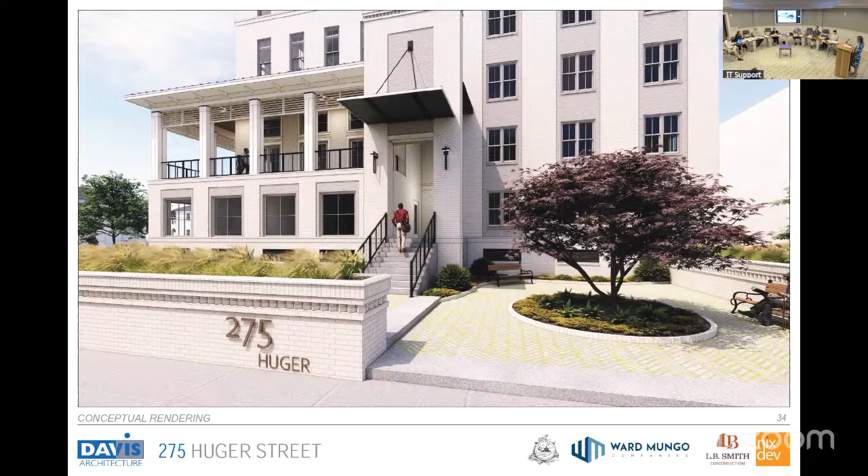The side elevations, especially the elevation facing Meeting Street, appear institutional and generic, which is not consistent with the look and feel of Charleston. We suggest that the massing and details are restudied to reduce the impact of the overall scale of the structure. The proportions of the windows on the front facade need restudy. The spacing from the top of the windows to the cornice is too large and somewhat visually awkward. Larger windows throughout the building would enhance the building's appearance, and we suggest a restudy of the overall fenestration.

Our recommendations are for the applicant to restudy the height, scale, mass, and architectural direction of the building and come back to BAR with the concept more consistent with other Charleston housing sites. Finally, we do appreciate that the applicant met with us and that they are attempting to design affordable housing development, and we look forward to working together to put something on the site. Thank you.

Anna Catherine Alexander with the Preservation Society of Charleston. We also appreciate the architect reaching out to discuss this project. We have long been supportive of creating new affordable housing on this site, and we were excited about the previously approved design, as everyone was. It offered interesting architecture and a dynamic ground floor.

And while we understand the need to make the numbers work for this project, affordable housing cannot come at the expense of quality design and contribution to the public realm. This building will not only be an important part of the streetscape along Huger, but highly visible from Meeting Street. Significant study is needed to break down the building's blocky massing, especially on the long east and west elevations, with greater depth, detail, and material variation. The monotonous, undersized fenestration should also be restudied to improve the overall scale.

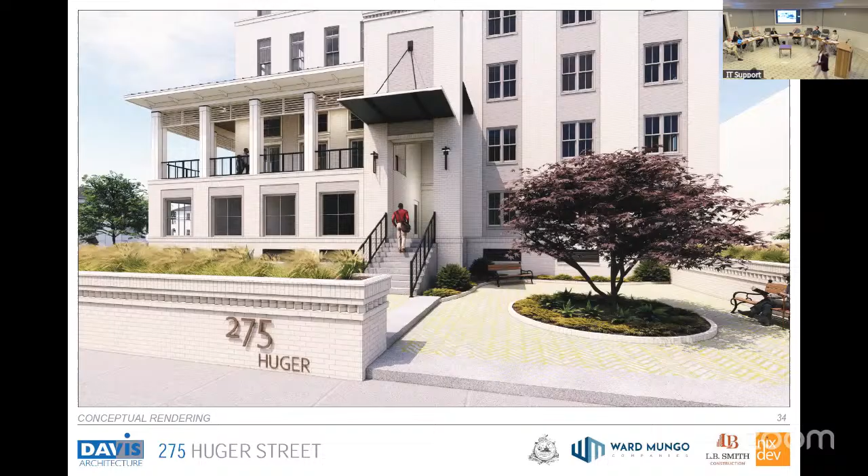Thank you. Any further public comment? City staff, comments and recommendations?

Sure. Oh, that was the one that was supposed to be up at the front. There it is. Okay, but staff appreciate the thorough package provided by the new applicant, as well as their previous meetings and willingness to engage the BAR in an iterative process. There we go. Staff

affirm the height scale requested in the submittal is appropriate for the varied but densifying context and to support the need for affordable housing on the peninsula. Staff also support the use of brick throughout as proposed. Staff's primary concern is with the massing and general architectural direction of the current proposal.

The Huger Street facade can serve as a means to conceptualize the whole, while some details need further study, differing cornice lines, string coursing, across the porch volume, etc. The overall initial direction is developing well.

As the applicant demonstrates through context renderings, the east elevation is highly visible from Meeting Street because the existing housing is modest in height and spaced far apart. Given this visibility, staff require the east elevation be composed as a main facade with the same level of attention and detail that is beginning to develop on the Huger Street elevation.

Currently, there is a lack of clear fenestration composition on the east and west elevations in the middle section. There is also no compositional relationship between the base fenestration and the upper fenestration. Staff encourage the applicant to pursue simplification and organization of the window types and patterns across the whole design. And while there is a nascent form, further development is needed for detailing a clear base, middle, and top ordering system is encouraged. Staff recommendation is for denial.